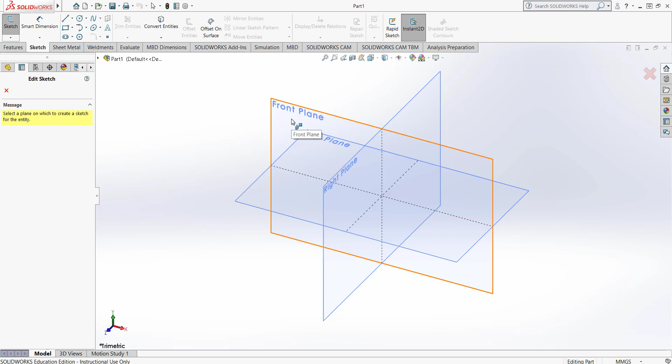So I'm going to draw the part, go to SolidWorks, go to sketch, and create the sketch on the front plane. Select the front plane, do a line here, click here, go right, zoom in a little, zoom out so I can go up and snap until the center one here, then hit ESC.

Since I'm going to mirror later, I'll need a mirror line, so I'm going to create a center line here, not exactly on the origin, but snap it a little bit below, and also put it up. You don't want to make a center line on top of another, or you might have an overdefined problem later. So only make one line here from this point to the top, don't make one line on top of the other.

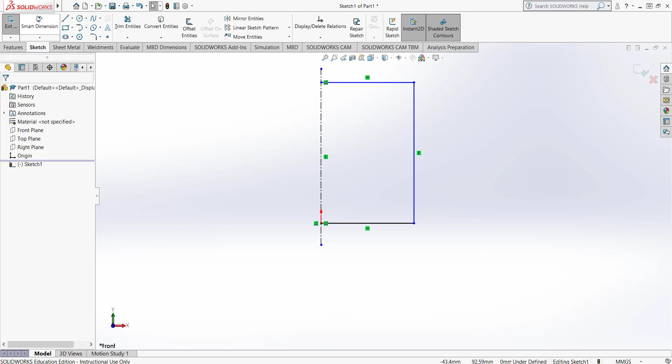Now I'm going to give dimensions. This is 100, so half of that is 50, and the height is 90. So 50 and 90 there. Go to smart dimension and set 50 here, and 90 as the height.

Now the part is all black, so it's fully defined. Also here it says fully defined. So you can click on this, then zoom to fit.

I'm going to grab this point. Go out of smart dimension and grab this point here. In SolidWorks, center lines don't count, so you could have a blue end, that's fine, but all the solid lines have to be black. So I'm going to click this point and drag it out a little bit to extend it.

Then we're going to save the work, find a directory that you want to save, and name it E4 for exercise 4.

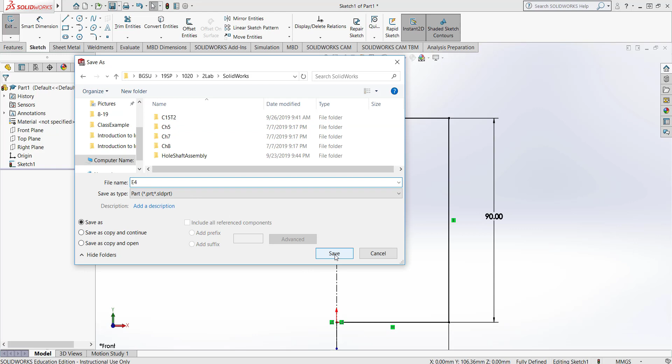After that, we're going to make a slot here. For the slot, I'm going to use this function, straight slot, and click the drop-down button.

This is what I'm looking for, the straight slot. It looks like the first one is the one I'm looking for instead of the other, so the first one is here. This is the first point, the second point, and the third point. So select those 3 points.

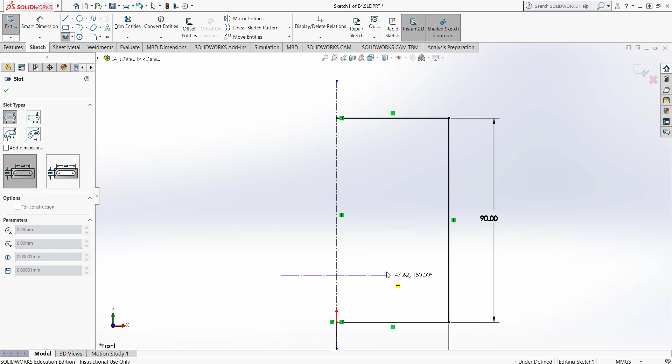So the first point is approximately here, the second point is approximately here, and the third one is approximately here. Put them there.

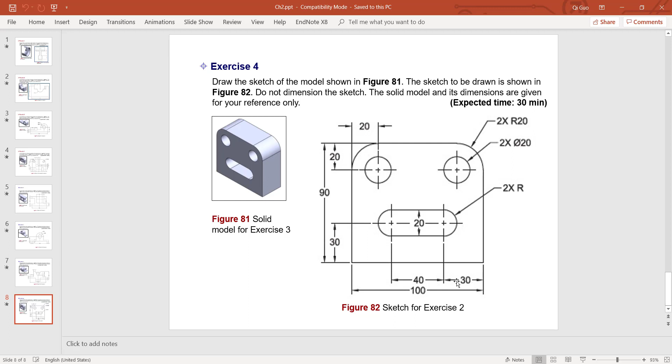Then we're going to give dimensions on it. This is 40 and the height is 20, so the radius is going to be 10 because overall it's 20 here. Let's give dimensions: from here to here is 30, give 40 from here to here, 30 from here to the right, and 20 from here to here.

Hit ESC. This point is supposed to be on the center line, but it's not, because we don't have the coincident relation. So I'm going to click this point and drag it around and put it on the center line.

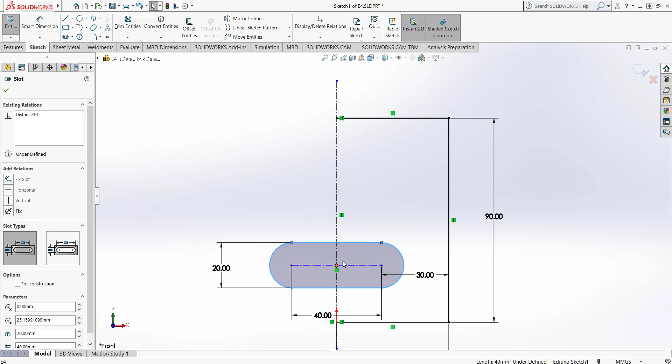Okay, still not showing up. Let's see how we can move this part around. As long as they're blue, you can move the thing around. The reason is we don't have a distance from here to the origin yet, so the part can move up and down. Let's find another relation.

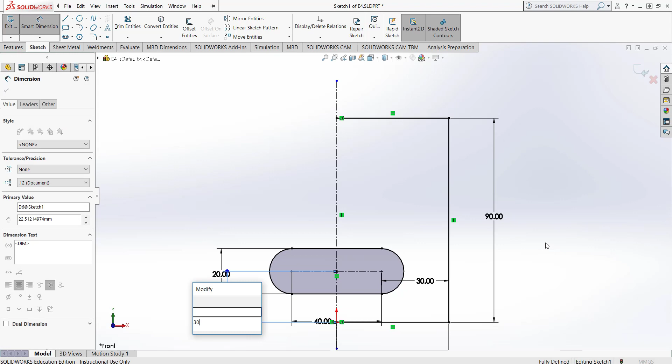Go back to the drawing. From here to here is going to be 30. Go back and go to smart dimension. From here to the origin is going to be 30. Now the part is all black, so it's fully defined. Save the work again.

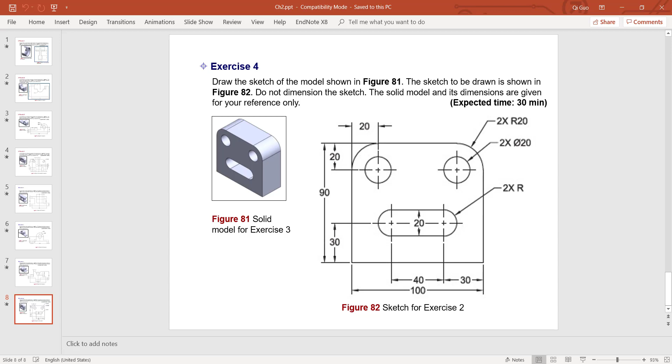Now we're going to create the center here. We're going to draw a circle with diameter 20. Two circles, the diameter is 20, and the x dimension is 20, and the y dimension is 20 as well. Then let's go back and draw a circle here, about here.

Go to smart dimension. The diameter is 20, and the distance from here to the right is going to be 20, and the height from here to the top is going to be 20 as well. So the part is black, is fully defined.

Now we're going to work on the fillet. Go here with the fillet, and for the radius, let's take a look. The radius is 20, so we put 20 here as the radius, hit enter, and for entities of the fillet, select those 2 points. Looks right to me, say OK, and save the work.

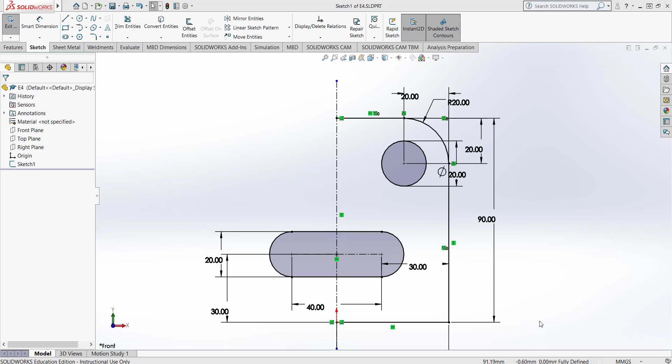Now everything is still fully defined, so we can mirror the part. Before we mirror, make sure everything is black, fully defined, as it says here. Otherwise when you mirror, you would have to dimension them twice. So make sure everything is black before you mirror it.

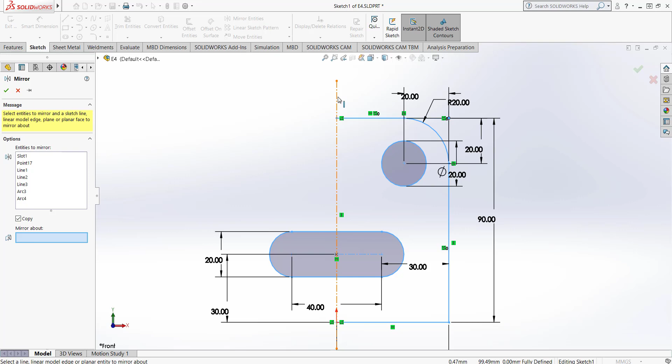Now we are going to mirror the part. So mirror entities, and for entities to mirror, we're going to select all of them, drag all of them here except the center line and the slot. And mirror about, then we're going to select the center line here. Let's say OK and see what happens.

So actually there are some overdefined, so we're going to click some of them and delete them. Delete this, and delete this, see what's going to happen. So everything there is still black, so we're good, and save the work.

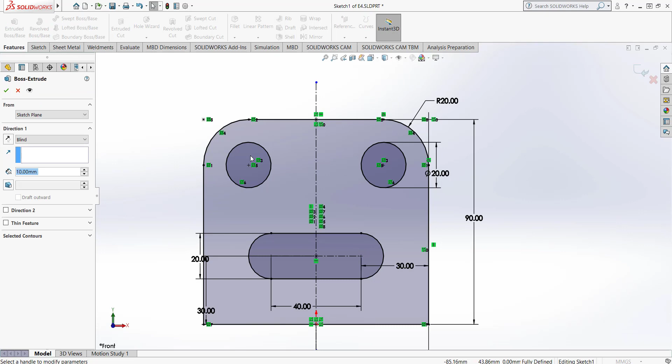And this is a sketch. Now we're going to extrude. We're going to go to features and go to extruded boss or base, select this, and it recognized we want to extrude in this way. Let's change the distance to 50, then hit enter.

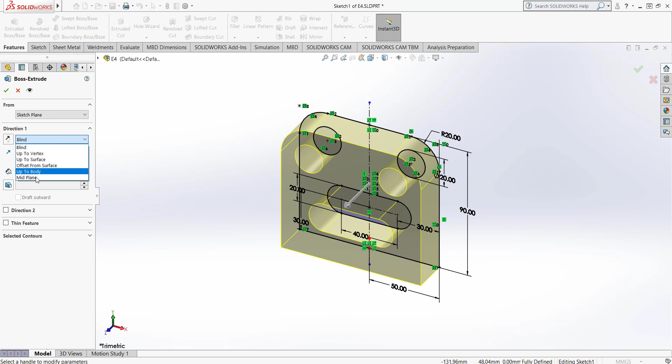So now it's extruding only in one direction. We usually put it in the center, in the middle, so you could change the direction, then go to the right and go to the left. Like we said, usually we select the middle plane in case we want to add more features, so it's right in the middle plane. It's a lot easier to create another sketch. Say OK for the part, and that's all we have for this part.

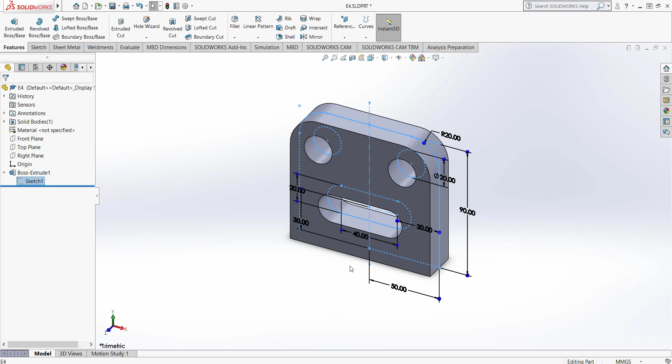Then we can double check. After you click this part, no minus sign in front means everything is fully defined. So make sure no minus sign in front. If you had that, you would have to go back to the sketch and see if anything is underdefined. It says fully defined here, so I'm good.

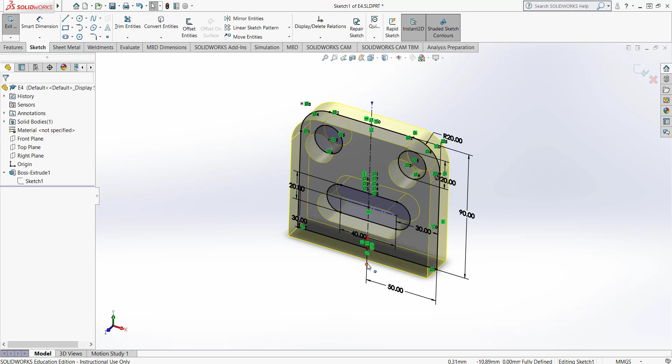So you're not supposed to have any blues. Everything is supposed to be black except those 2 center line points. Now it's good, then you can save the work. That's all we have for this part.